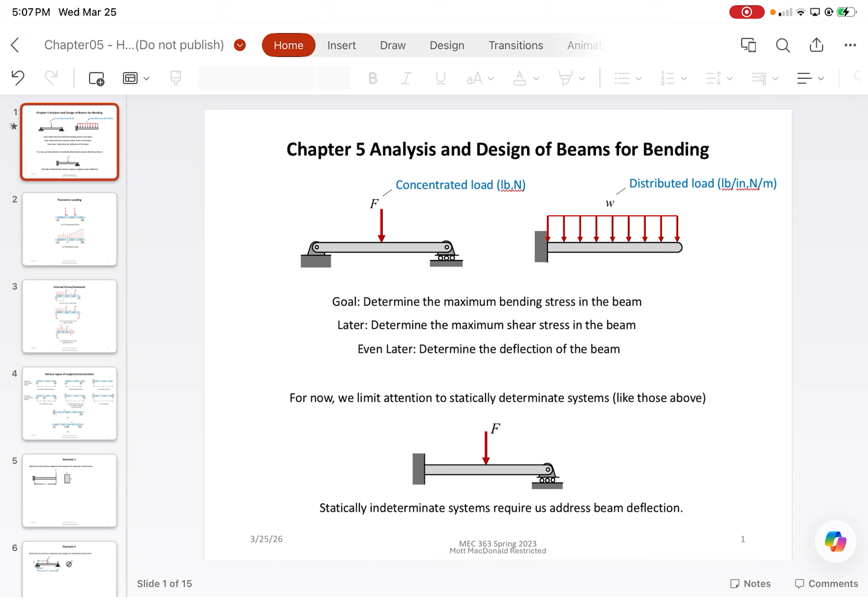So we have different types of loads, including transverse loads. In this case, what you guys might have seen previously, let's say that P1 and P2 equal each other. Then one thing you'd likely notice is that in this case, B and C would be subjected to pure bending.

However, when they're not equal to each other, it's not pure bending. It's actually a combination of bending moment and shear forces, which complicates the problems a bit. We can still handle it, but it's not like the stuff you'd see in chapter 4 where we had pure bending and you're just given a moment. So this is going to show you how to obtain those internal moments from analysis.

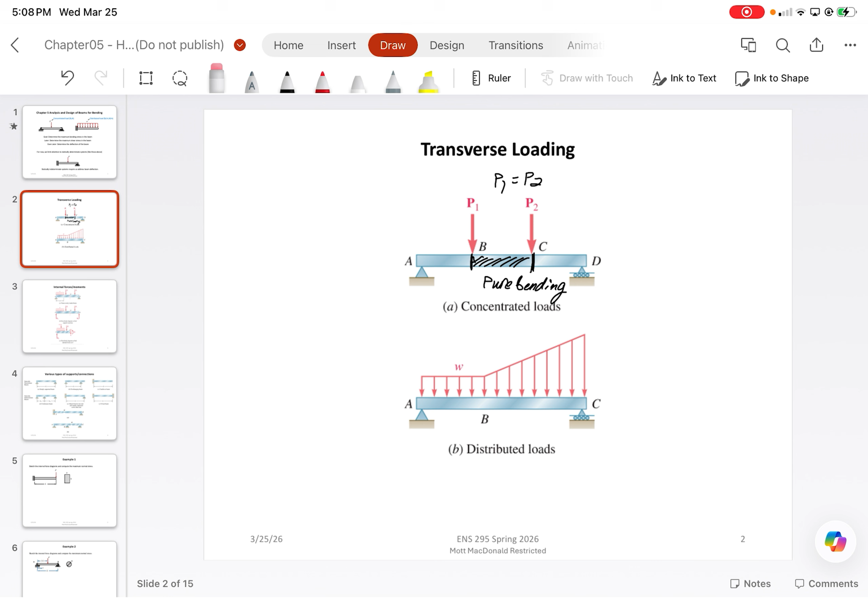Other than concentrated loads, we can have distributed loads. The loads ultimately affect the internal forces of the structure. A nice way to think about it: 10 pounds of point load directly at the center of the beam does not equal 1 pound per foot on a 10-foot long element. Yes, it's the same amount of load and it'll be exactly the same for external equilibrium, but for internal equilibrium, the behavior is actually entirely different.

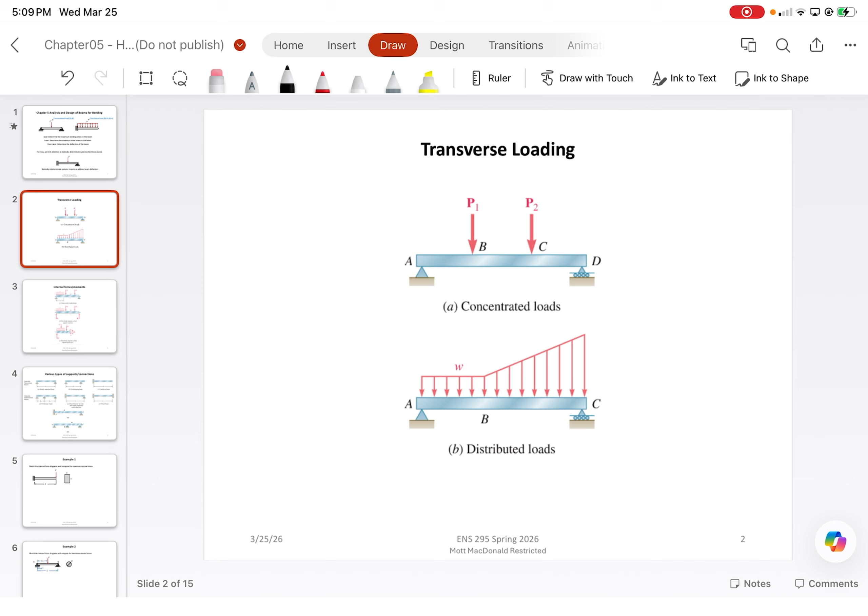Let's say that we had that beam from the previous page. Let me delete this really quick to make it easier. So let's say we had a beam here, with a pin here and a roller here, and it's subjected to some forces or whatever. It doesn't really matter what the forces are.

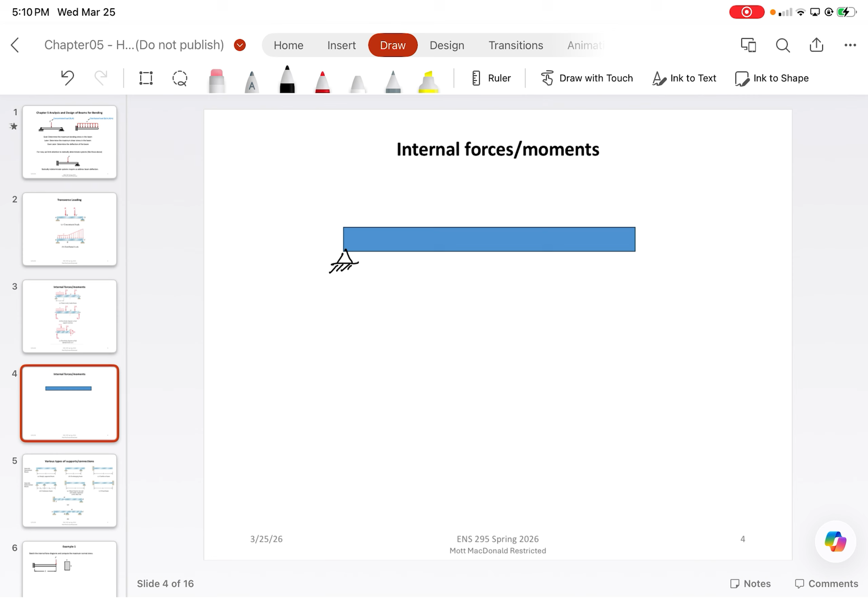What the textbook will show you is this sign convention, generally considered in industry as the positive sign convention. Any textbook solutions or homework problems will always show section cuts taken with respect to the right-hand side, with shear moving vertically downwards and moments moving counterclockwise. Moments are positive that way because of the right-hand rule, but shear is positive moving downwards because we assume the beam under most loading cases is technically moving vertically downwards. So in a lot of cases when designing with beams, vertical displacement downward is actually positive, not negative.

Here, what I want to show you is a different kind of methodology for dealing with these types of problems.

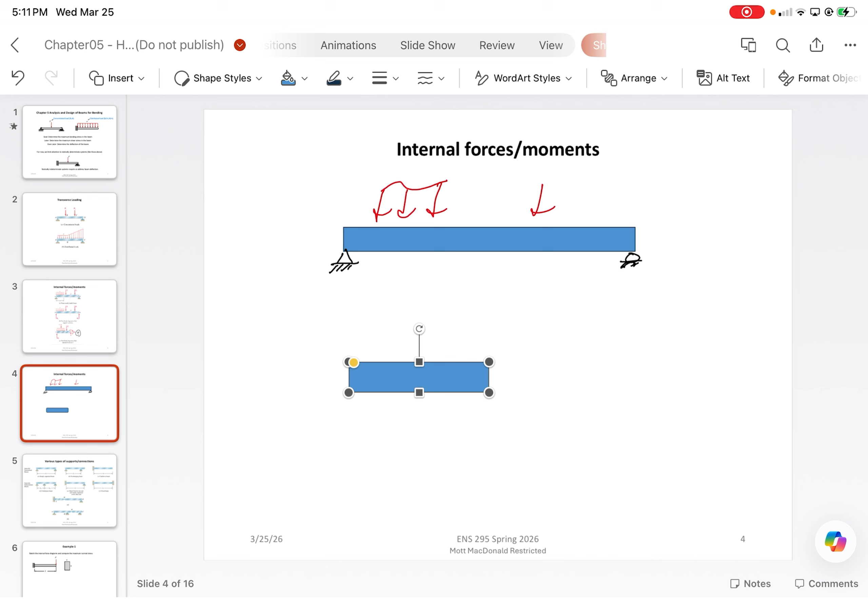Let's say we had the beam and we cut a section here, subjected to some type of loading, with a reaction force R, we'll call it W. When you cut a section through here, what I like to do is draw a little reference fiber, which is basically the side we're using for our sign convention. From here, I'll assign a shear force, not necessarily enforcing vertical downward movement, but indicating that the shear force is going towards the reference fiber. Then we apply a moment such that the reference fiber gets placed in tension. That's the positive sign convention.

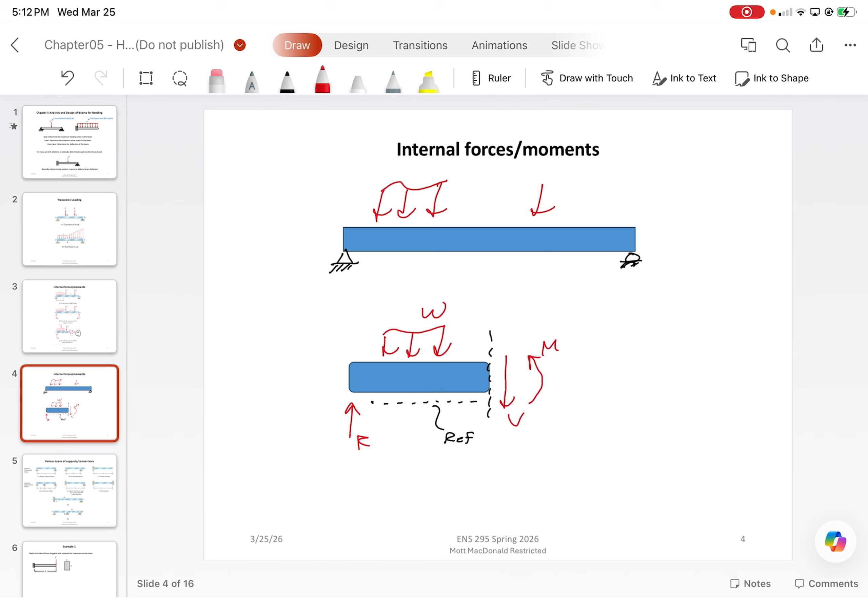Now, what if instead I wanted to analyze the forces on the left-hand side? Let's say we cut a section right through here, and this was the point load, and this was another reaction, R2, and we'll call this P. Then we can draw a reference fiber here, but on the left-hand side, positive shear would be moving away from the reference fiber, and the moment would still go in such a way that it causes tension.

Now, does the reference fiber need to be directly on the bottom? No, you can assign the reference fiber however you want, but then you need to follow the sign convention rules we just discussed. For example, if instead I wanted to assign the reference fiber up here, then technically we should apply a clockwise moment M such that the reference fiber is in tension, and a shear force V where the force is going towards the reference fiber. That would be the positive sign convention for that reference fiber.

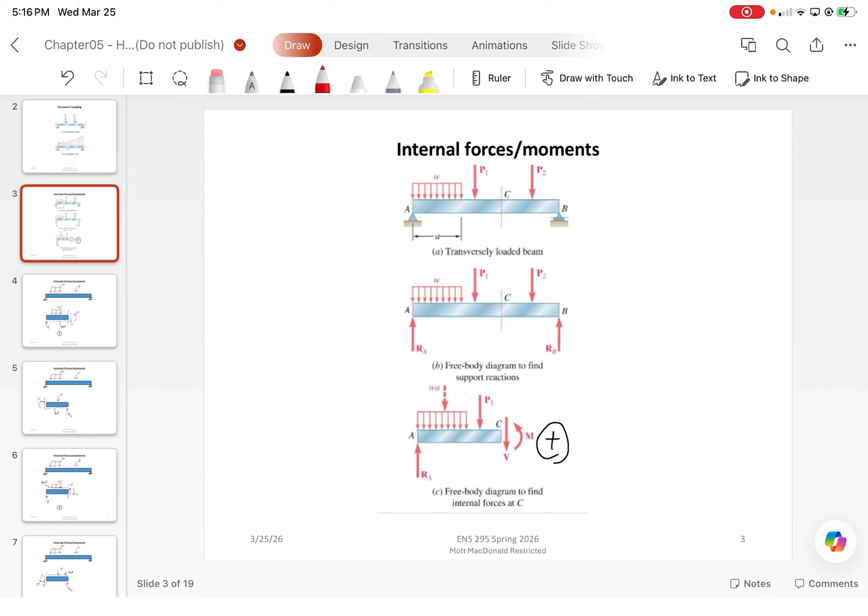The reason why I'm telling you guys about this reference fiber stuff is because for most numerical software that you see, they use local and global coordinate axes in order to clarify positive and negative shear. And so the magnitude of those forces is heavily dependent on how the coordinates are defined in software. So just because you get a negative bending moment does not mean it's bending a certain way. You need to look at the coordinates and be able to interpret your results. I know it can get a bit confusing. We'll work on examples later on.

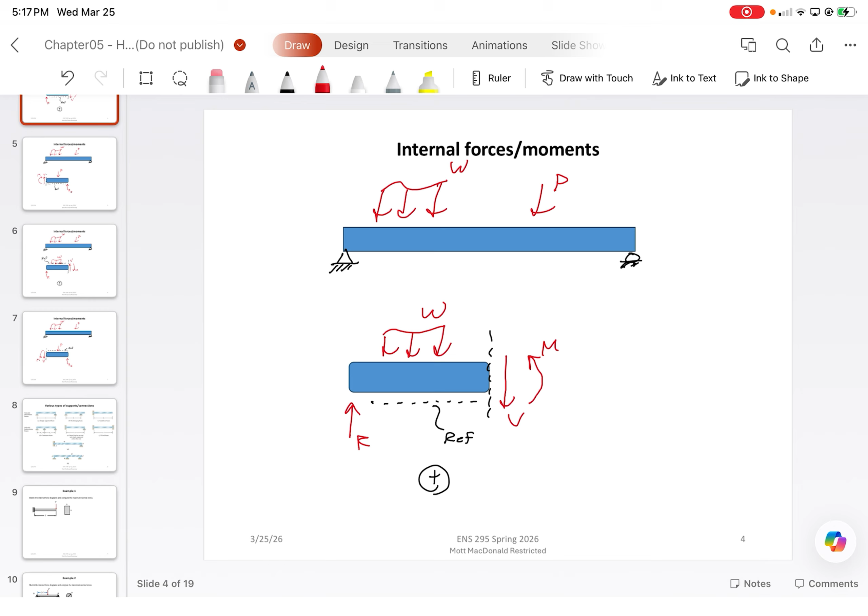In some complicated scenarios, you can have case A, where you may have a fixed end, a hinge, and then a roller. That would actually be a statically determinate system. So here, this is technically statically determinate. And then the same thing here with the pin and two rollers. Because of the fact that you have a hinge, it's also statically determinate.

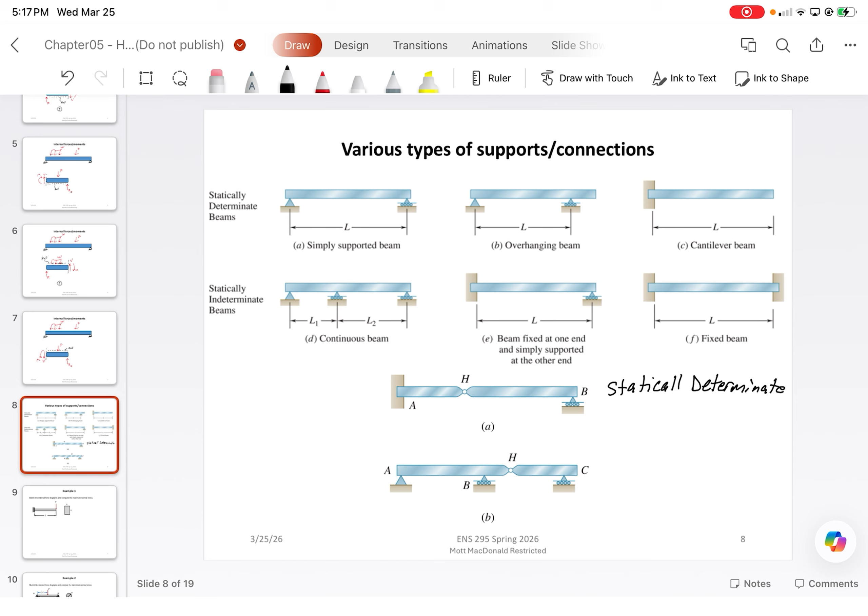The reason being is because you can split the structure at the hinge and then basically separate it into two beams. So you can separate section A into beam AH and then beam HB. And then you can solve for the pin forces, because the pin forces are going to be the same in both sections of the structure. The force is transferred. So because of that, you can actually solve those relatively complicated structures using hinges.

Have you guys worked with hinges before in statics? No? You guys haven't seen really frames or anything like that? Did you guys see frames in statics? Yeah, you did? And you guys didn't deal with hinges at all, with complicated structures? Oh, this is going to be a fun semester because I'm going to be doing that.

All right, so I think just getting straight into the thick of what we're trying to get to, I just want to give you guys a straight up example. All right, so I want you guys to sketch the internal force diagrams and then compute the maximum normal stresses.

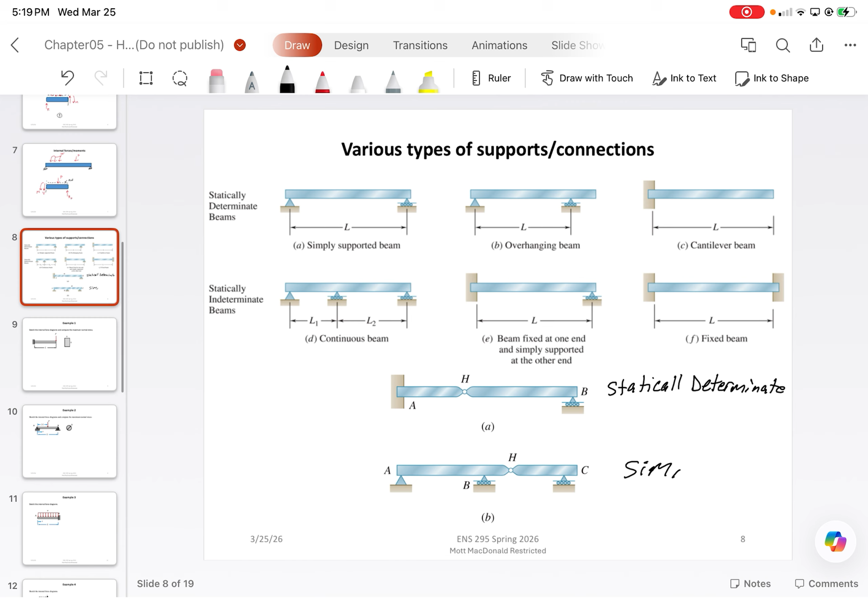All right, so the first step of any single one of these problems is to conduct external equilibrium. It's almost going to be nearly the same exact steps as axial loads. All right, so what type of reaction forces is the fixed end subjected to?

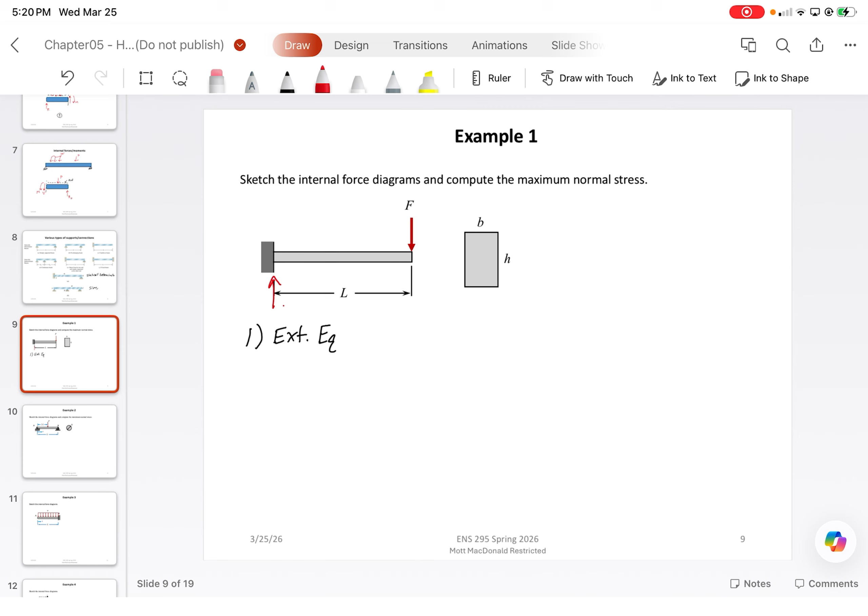Now, the next step to solving these problems is to cut a section. In this case, let's cut a section right through here, and we'll call this section A. Just to simplify things, let me redraw it.

This is internal equilibrium, which I'll do in blue. So we've got the fixed end here, this is the line, and that's our section A. Our externally applied forces are FL and then F.

Now let's assign a reference fiber. What do you guys want to look at, top or bottom of the beam? Let's just look at the bottom for now. So we'll say the reference fiber is at the bottom, and the length of this section we'll call X, some arbitrary dimension.

Now, if we assign the reference fiber to the bottom of the beam, what do the internal forces need to look like? How are they drawn? Look back at how we sketched the diagrams previously. It should be going down, with the moment going counterclockwise. Shear is vertically downwards, and then the moment is counterclockwise.

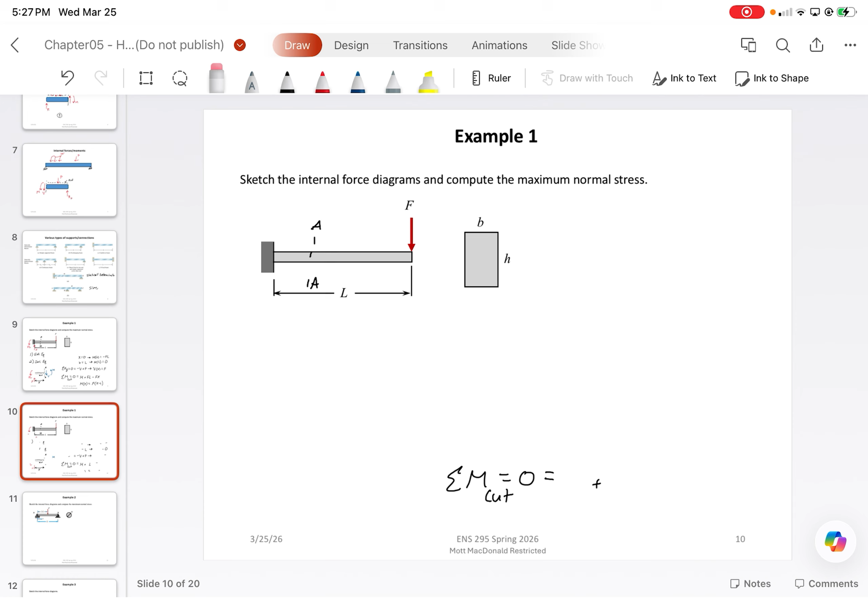Now what we do is draw our internal force diagrams. I personally like to draw them really neat. So that's going to be for shear, this is going to be for moment. We know our shear force is constant F along the entire length, so F, and then it closes out, and that shear force is F. So this is a state of pure shear.

Now for bending, on the other hand, at the initial position it's negative F times L, so it goes down to negative FL. And then we notice that from M of X, it's a linearly increasing bending moment, so our internal diagram closes out to 0, where M of X is equal to F times X minus L.

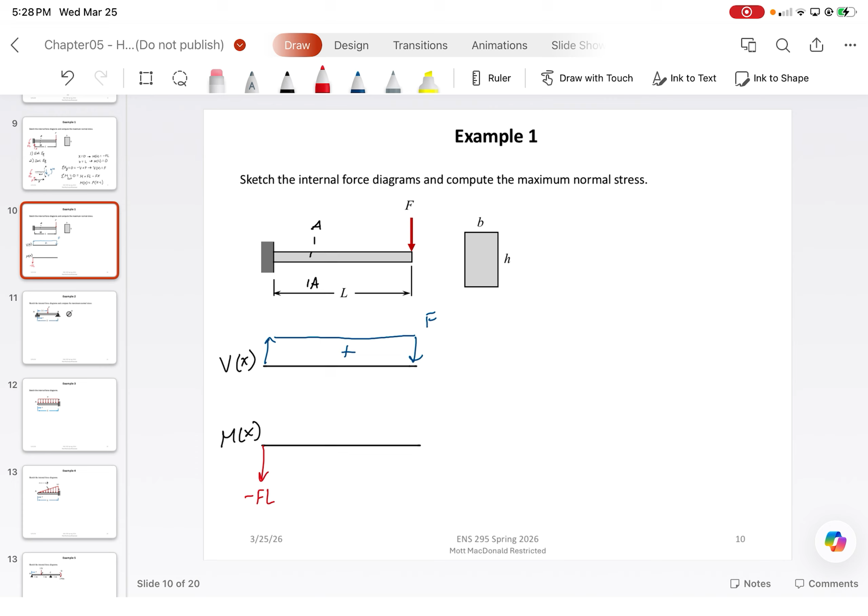And then from here, if you wanted to, you can find what the maximum bending stress is using M*y over I. For a rectangular cross-section, we can simplify this to just be M over S, where S is equal to bh squared over 6, which means our bending stress is just 6M over bh squared.

But here's the thing: if we wanted to find the maximum bending stress, what's the moment we would plug in? Negative FL, right? So sigma max is equal to negative FL times 6 over bh squared.

Or if you wanted to express it in terms of sigma x and plot the stress, just plug in the entire function and set iterations for differing values of x. This is if you wanted to plot the shear and moment diagrams as functions of x in MATLAB or Excel. This especially becomes helpful if you have b or h varying as a function of x, because then you can really see how it varies.

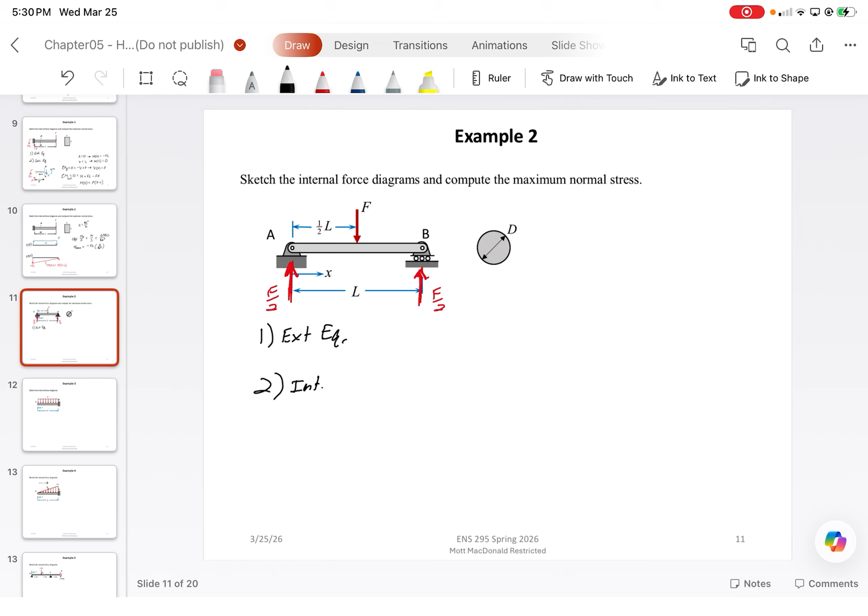So you're actually going to need to cut two sections, because you'll have two internal force components. So if we let this equal to A, this reaction is F over 2, and this dimension we will call X1.

Let's again say that the bottom here is the reference fiber, such that V is moving vertically downwards and M is anti-clockwise. We can sketch the internal shear and moment equations. So from sum of the forces in Y equals 0, what do we get for our equation?

Exactly. Which tells us that the shear force, because of the fact that the load is applied at midspan, is about half the load. So when you're designing the beam, you only need to design for a shear force of half of F, all right? You wouldn't believe how many times I have students trying to just plug in F—I'm like, you're doubling the load that's really required.

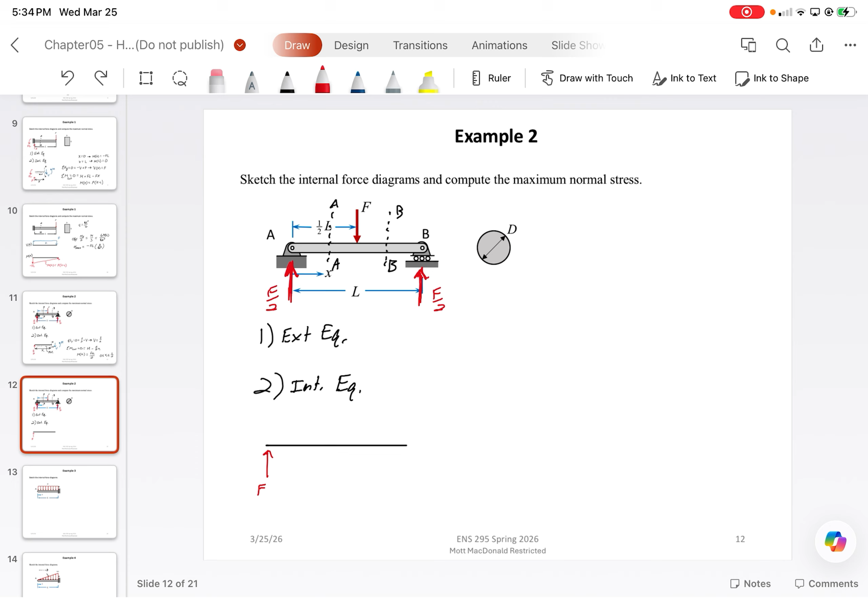Again, we'll just say our reference fiber is on the bottom, with shear force and bending moment defined. Do sum of the forces in Y equals 0, and we'll get F over 2 minus F minus V, and we'll actually get that the shear force is equal to negative F over 2. Notice how it's negative now and not positive—this is important to note. This is why we need to cut that second section.

This will actually tell us, interestingly enough, that the beam will have a tendency to kind of move upwards from that point. It's weird to think about, but imagine the beam was vertically loaded downwards like that—you can see the beam is tending to go downwards, and then from that point going to the right, it's going upwards. Again, negative shear is indicating upwards movement versus positive indicating downwards. So because it's negative, the beam is trying to go back up.

Now, from the moment about the cut equals 0, we're going to get M plus F times X2 minus F over 2 times L over 2 plus X2. All right, simplify this: M is equal to FL over 4 plus Fx2 over 2 minus Fx2.

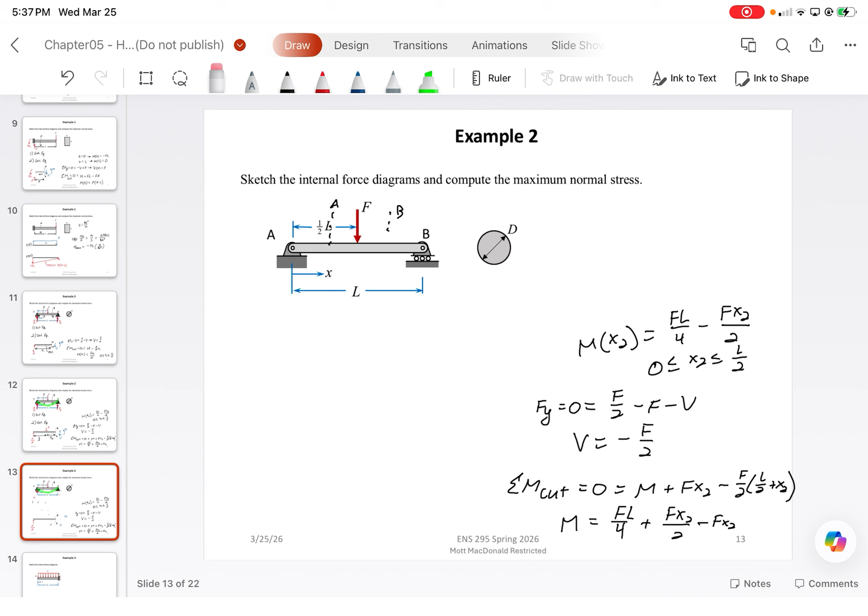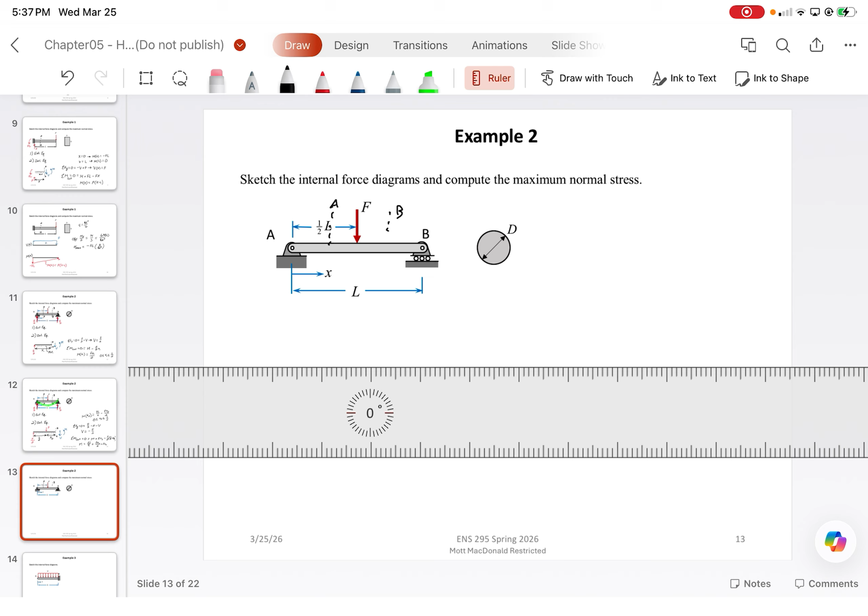All right, we'll use this for our shear force diagram, and this here for our moment diagram. Shear force, we got that it was positive V F over 2 for section A, and then we got that it was negative F over 2 in section B.

For the bending moment, what do we notice? For all values of x1, it's positive, which indicates that the bottom reference fiber is in tension. For x2, it's still technically positive because we have a y-intercept of FL over 4, it's just that this time the bending moment decreases as we go to the right. So our bending moment will look kind of like this.

And that's how the beam looks, the bending moment diagram.

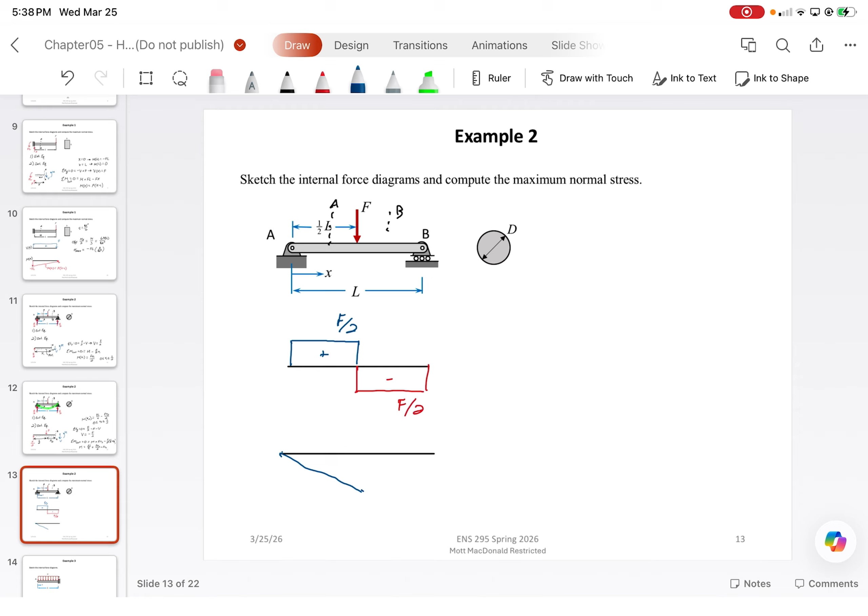Similarly, if you wanted to compute the maximum stress, you would need to know what the section modulus is, or you can use the My over I equation, but I think we can skip that step. Hopefully you guys know how to do that. This would obviously just be the maximum bending moment.

Any questions about this example? They get much more complicated.

For example, in example 3, now we have a distributed load. It's not as bad as you think. First, we need external equilibrium, right?

What is our external equilibrium going to be? We're going to have a BY, and then a moment.

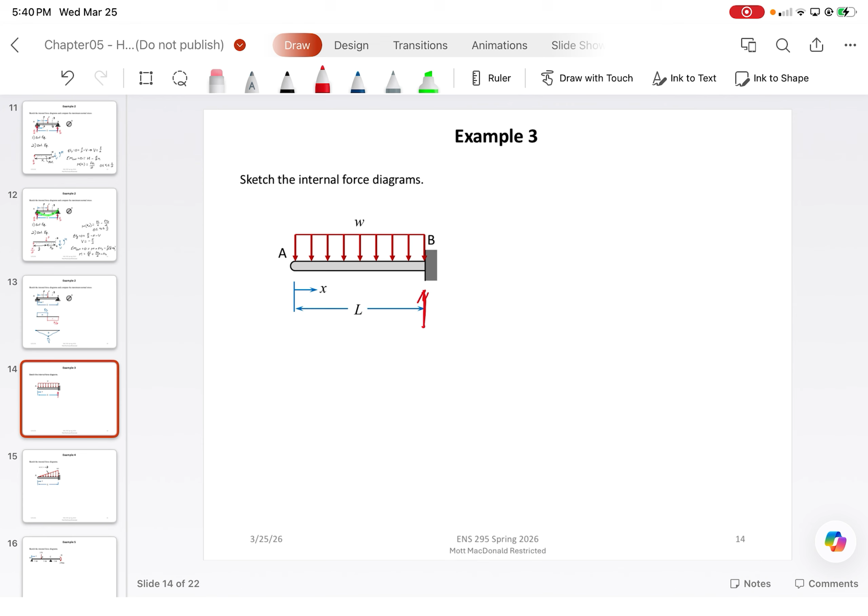Notice how the coordinate is taken with respect to the left. That's just a problem-defined thing. You guys can obviously assign coordinates however you want in practice. This example is just calling for the coordinate from the left-hand side, so pay close attention to that in terms.

What's BY and what's MB?

Would BY be like W times L, since it's like the whole distribution over the length? Exactly. But what about MB?

You guys did see distributed loads, right, in statics? Statics was a year ago. A year ago? What? No, say what you're going to say.

Come on, Travis. Is it the weight integrated over the length from 0 to L? Yes, that's the force, which would give you W times L.

And then, where's all of this load technically acting? Where would it be concentrated? It's a rectangle, so it's right at the center. So it would be WL times L over 2.

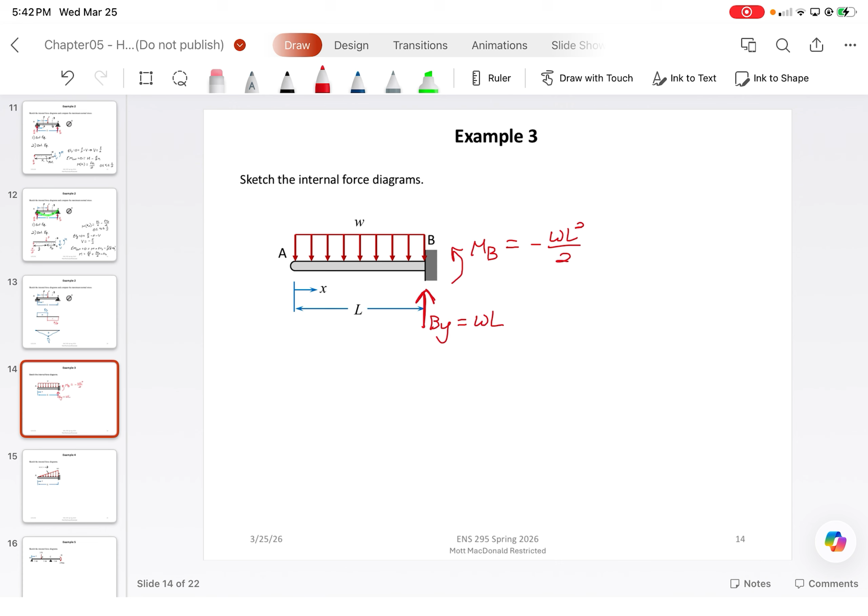Now for internal equilibrium. One thing that's nice about this problem, and most times with distributed loads, is that they're continuously loaded, which means there's no immediate discontinuity, so we can express the shear and moment diagrams as one expression. If I had a point load here, you would need to break up the diagrams accordingly. But because it's just a distributed load, it's nice and simple.

So let's cut a section, let's say right here, A. And then we draw the distributed load as such, with a coordinate of x.

Now, what do you guys want to do for the reference fiber, top or bottom? Let's do top this time. Which means that for our sign convention, shear should move upwards, and then the bending moment should cause it to be in tension.

All right, so do sum of the forces in y equals 0. This is going to be negative W times X plus V, which means that our shear force is equal to W times X.

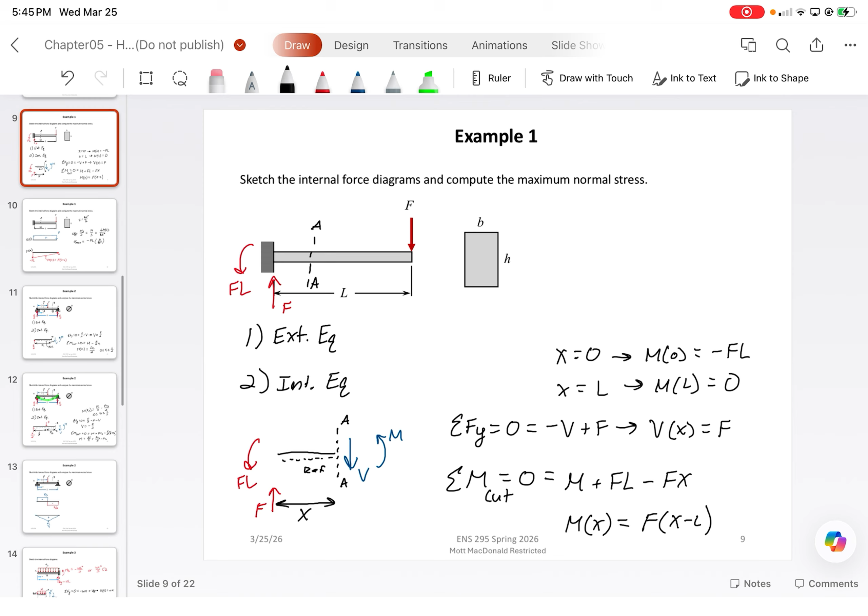Primarily because in some instances, like the shear force, previously we had seen that it was just point loads, so the shear force didn't really matter. It was just a constant value, but the bending moment was a function of x. When you're dealing with distributed loads and higher magnitudes of x to the n or whatever, then it becomes more of a function, the shear and moment.

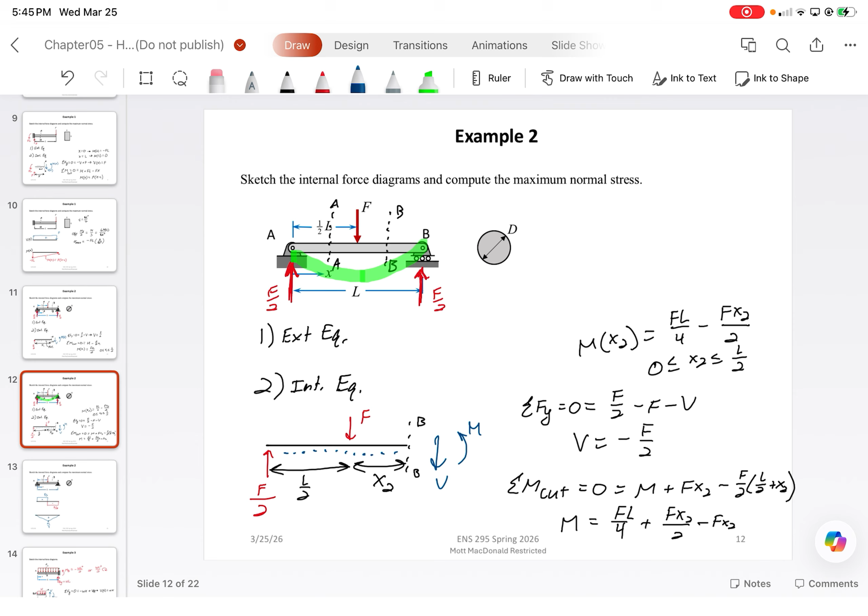So if I just write v or v of x, they're synonymous to each other. That's what I'm trying to get to.

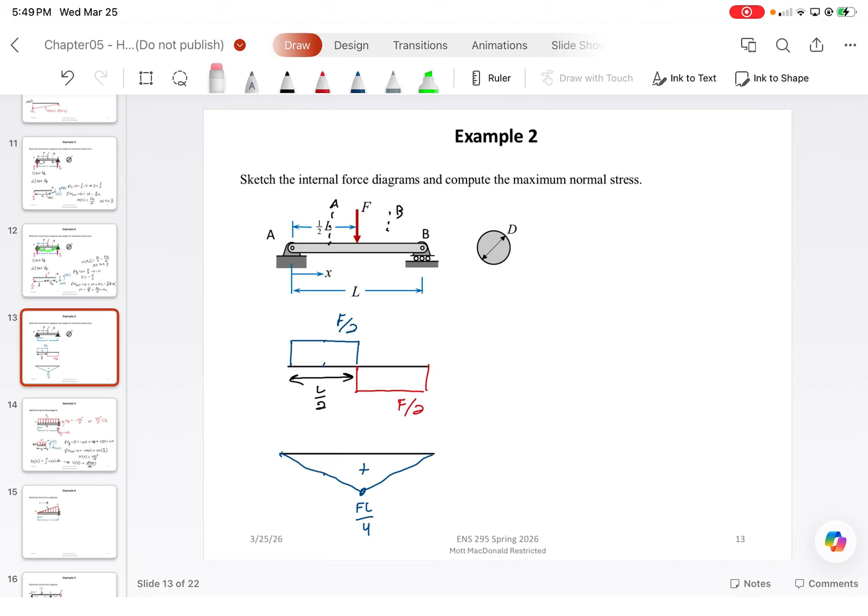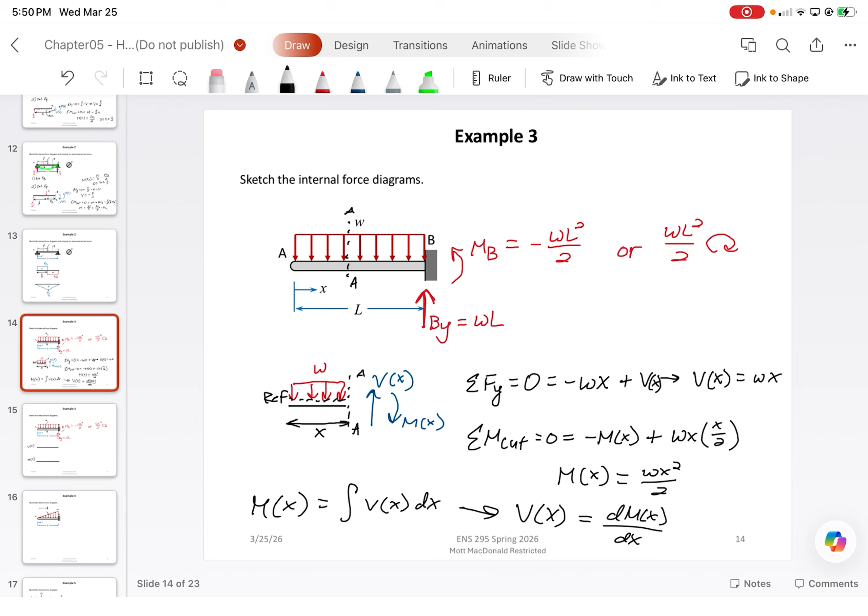And that's assuming that this is our reference fiber. The bending moment varies quadratically, Wx squared over 2, which means that our bending moment is going to be quadratic, up to WL squared over 2.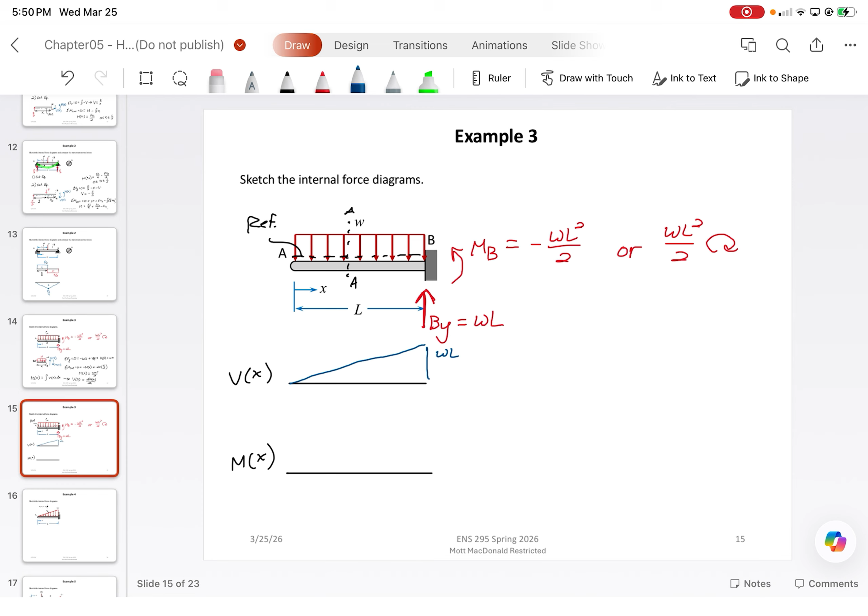Now, if we had used the sign convention that we had previously dealt with, where the reference fiber was on the bottom, then our diagrams would basically just be negative and negative. So it would be the same equations, just everything is negated.

Are there any questions about this so far? Nothing?

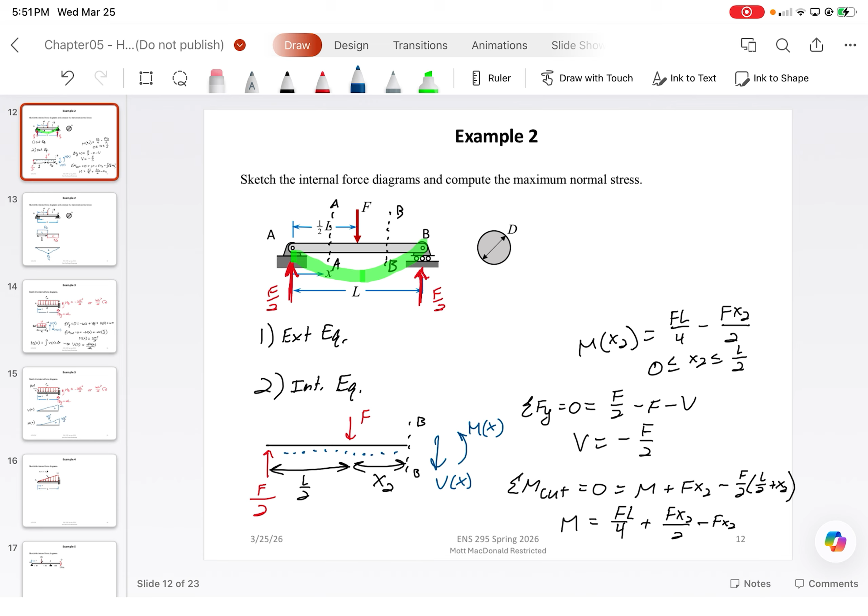Good, because the next one is a fun one. Triangles. I hate these because they're annoying. But wait till you guys see the integral problems. I will not be doing that one. That's why I took it out of the PowerPoint. I don't even know if it's on the Brightspace one, but there's problems in your Beer textbooks.

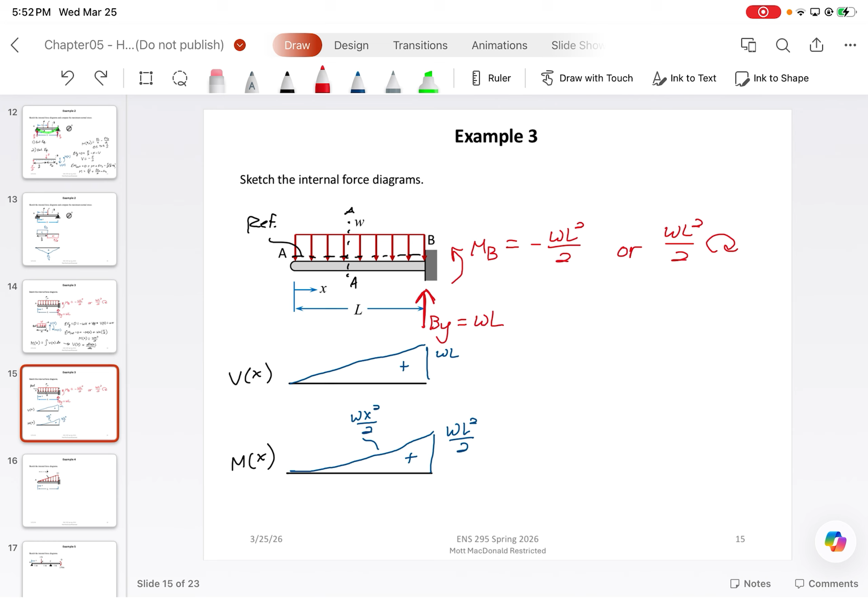All right, so how would we solve for this? First step, again, external equilibrium. MB, RB, or BY, I'll say. What is BY and MB equal to?

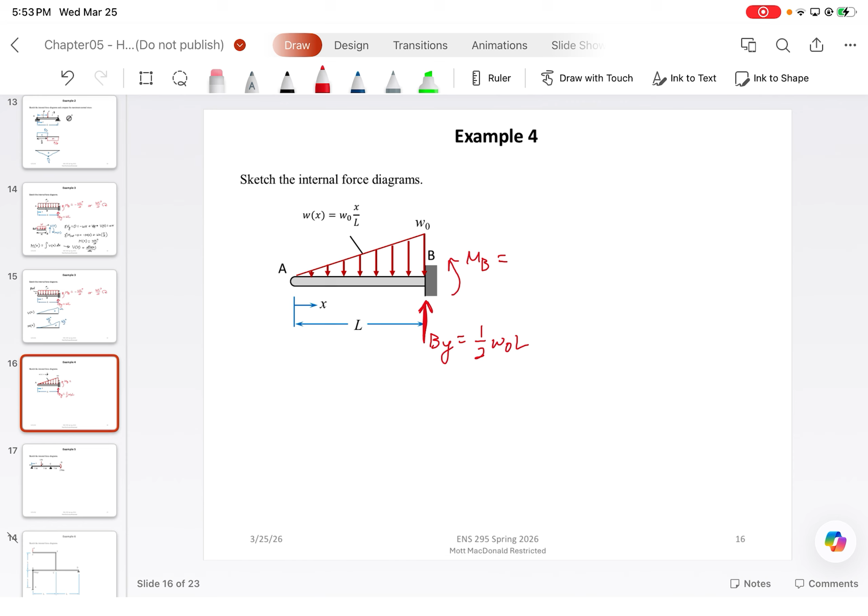All right, and this is obviously going to be negative because of equilibrium. It's going to have to be negative.

All right, now the fun part again, cut sections. This is a continuous function, so because of that we could just cut one section, AA. For this case I'll use the reference fiber on the bottom, so our shear force goes downwards towards the fiber, and our bending moment causes the fiber to be in tension. And then we draw our applied load.

But here's the thing, what is the magnitude, the peak of this triangular load here? Any guesses? I'll give you a hint. It's nice and simple, and it's already written on here because of the fact that our x-coordinate is taken from the left. If it was taken from the right, it would be a much harder, more challenging thing because then your diagram would technically be a trapezoid. Is it W? Not W.

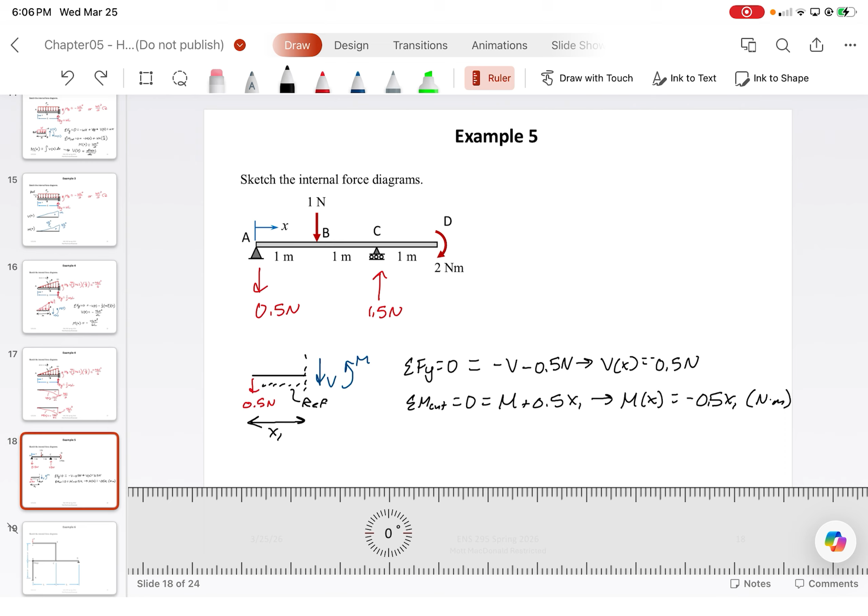Again, we want to keep consistency with our reference fibers. So we have V, M, sum of the forces in Y equals 0, equals negative V minus 0.5 newtons minus 1 Newton. So our shear force as a function of X is just going to be negative 1.5 newtons.

Now sum the moments about the cut. We get M minus 1 Newton times x2, so that's just x2. Or plus, technically, because it's a counterclockwise moment. Plus 0.5 times 1 plus x2.

So our bending moment is equal to negative 0.5 minus 1.5 x2. Am I right with that? 0.5 times x2 plus 1 x2 is just 1.5 x2 plus 0.5. Negate everything, so yeah, that should be it. That's m of x2, and v of x2.

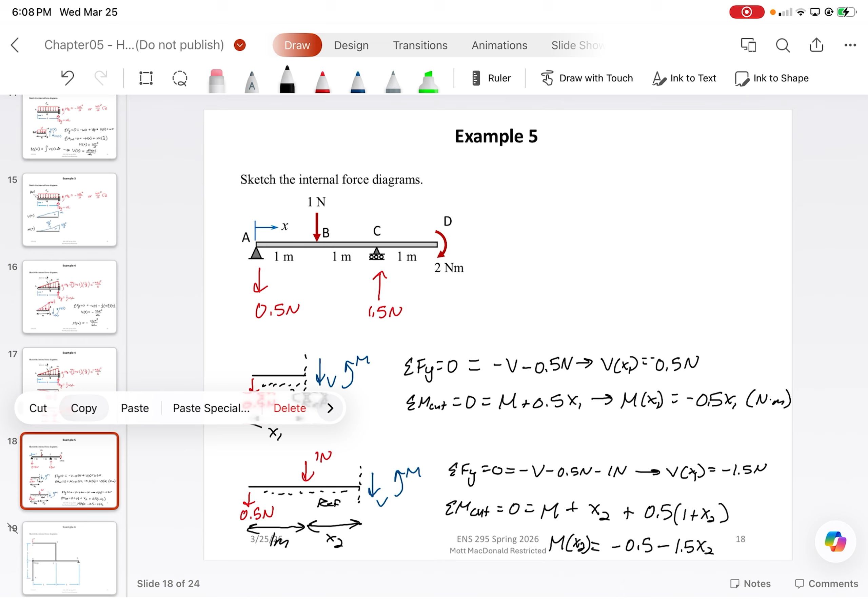We just erase all of this. Lastly, let's do our third cut. Add 0.5 newtons, 1 newton, then 1.5 newtons. This is 1 meter, 1 meter, and then x3.

We have V, M, and this is our reference fiber. Then we do sum of the forces and sum of the moments. Forces in Y equals 0: negative 0.5 minus 1 plus 1.5 minus V. This gives us a shear force, V of x3, of 0.

Then we do sum of the moments about the cut equals 0. Which should be 0.5 times 1 plus 1 plus x3, plus 1 Newton times 1 plus x3, minus 1.5 times x3, plus m of x3.

I'll give you a hint: M of x3 just equals, I believe, 2 Newton meters. Or is it negative 2? Let's see, 1, 0.5, 1, 2. Yeah, because if x3 equals 1, then it's 0.5, 1, 2, 3, so that's 1.5.

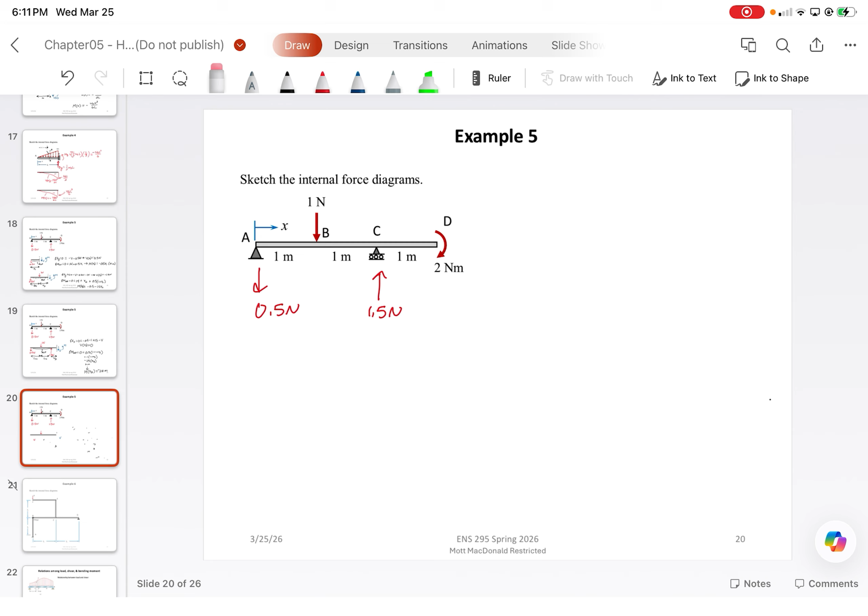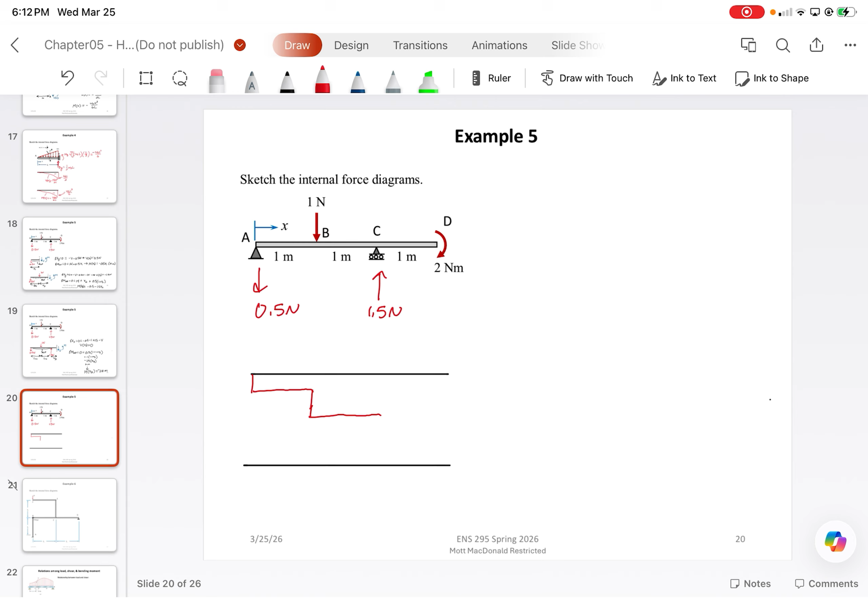And then for bending, the entire thing was undergoing negative bending. So negative 0.5 times x1, meaning that the bending moment varied linearly. Let me resketch this slightly. And then it was negative 0.5 minus 1.5 x2, which means it decreased linearly but at a greater slope.

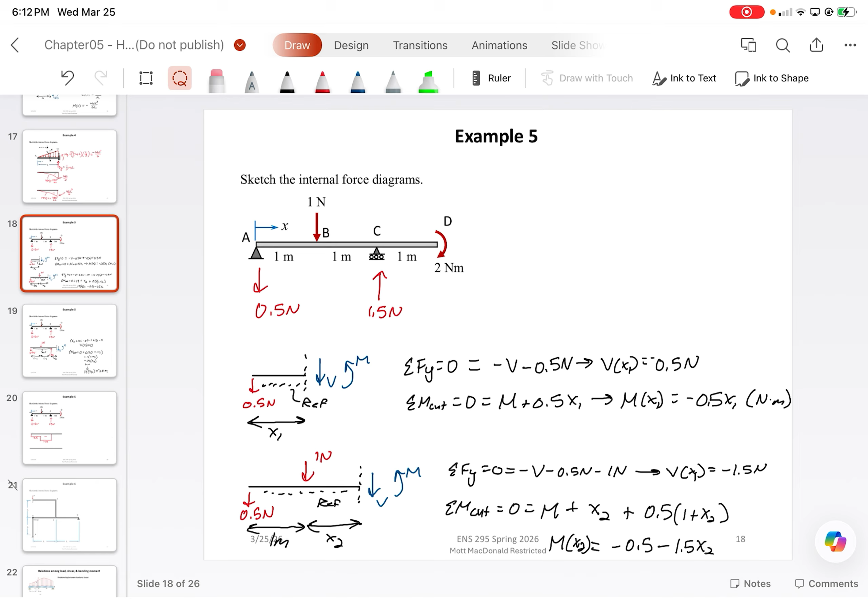And then it was constant. So the bending moment here is negative 0.5, and then the bending moment here is negative 2. That's V of x and M of x.

Any questions? As much as I would love to go into the frame analysis, I think I will jump into that next class because it is about three pages worth of work, so it takes some time. I think we'll leave it here.